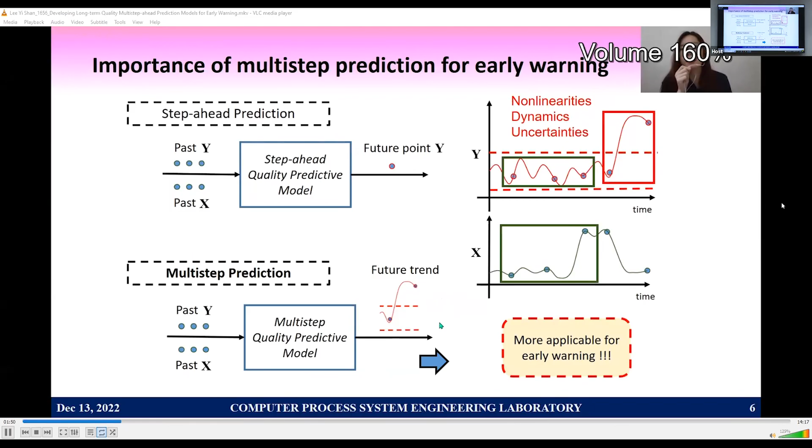So here is the brief idea of the multi-step prediction system. We will first construct a multi-step prediction model to predict the future process outputs from process inputs. Then a quality conversion model will be constructed to represent the static relationship between the future process outputs and the future quality data. With the combination of the multi-step prediction model and the quality conversion model, early warning is done.

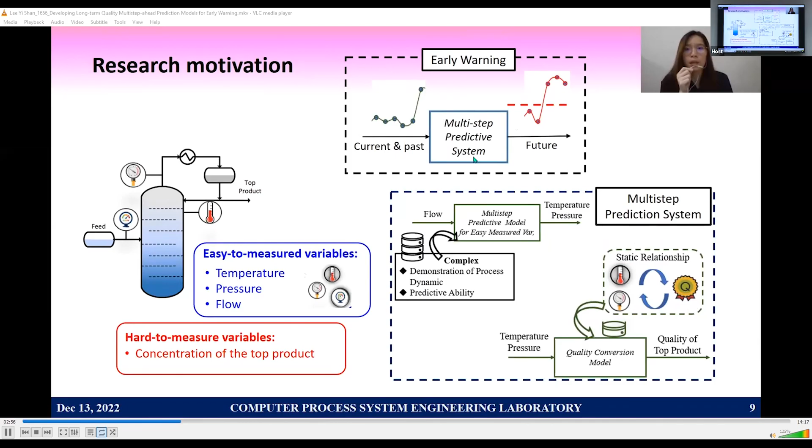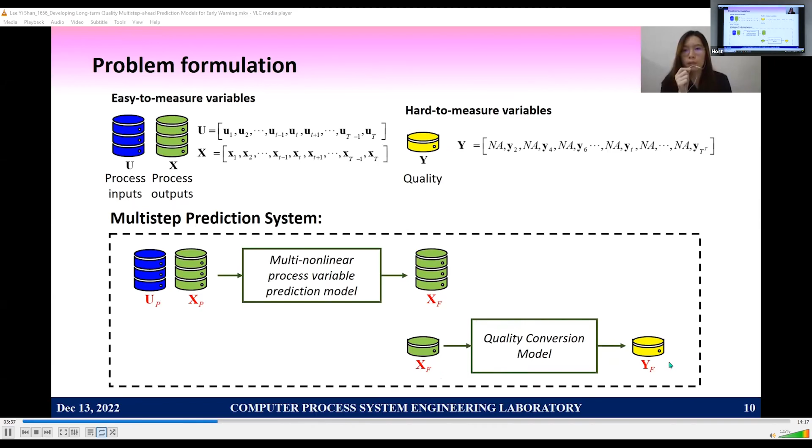So for the problem formulation, U represents the process inputs and X represents the process outputs. Y represents the quality variables, but some of the quality data is missing due to the difficulty in obtaining it during production. In the multi-step prediction system, by using the multi-step nonlinear process variable prediction model, the past process inputs and the past process outputs are used to predict the future process outputs. Then, in the quality conversion model, the future process outputs are used to estimate the future quality variables.

The multi-step nonlinear process variable prediction model is called the multi-step nonlinear state space model, multi-NSSM. It is developed based on the state space model here. The objective function of the multi-NSSM is defined to maximize the conditional relationship from the past process variables to the future process outputs. Hence, variational inference and Bayes rules are applied to derive the variational lower bound, and this is the variational lower bound to be maximized.

And this is the model structure of the multi-NSSM. The KL divergence term here represents the distance between the posterior and prior distribution of the past latent data conditioned on the past process inputs and outputs. To calculate this term, the past process inputs and the past process outputs are sent into the bidirectional RNNs, and it outputs the distribution of the past latent data.

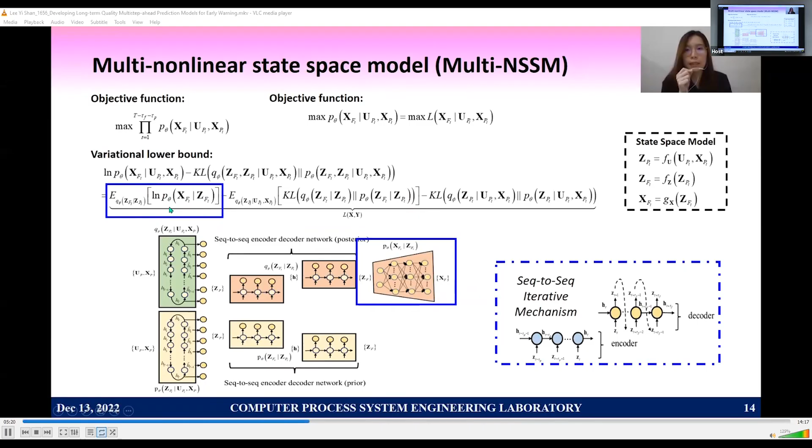Then the KL divergence term here represents the distance between the posterior and prior distribution of the future latent data conditioned on the past latent data. To calculate this term, the past latent data are sent into the sequence-to-sequence encoder-decoder network, and it outputs the distribution of the future latent data. After that, the future latent data are sent into the emission network, which outputs the distribution of future process data. Hence, the likelihood term here can be calculated according to this emission distribution.

So after the multi-step prediction model for the process variables is explained, now is the turn of the quality conversion model. The quality conversion model is called the regression VAE. It is developed based on the latent variable model here. The objective function of the regression VAE is defined to maximize the joint relationship of the process outputs and the quality variables. Hence, this is the variational lower bound derived from variational inference, and it has to be maximized to train the model.

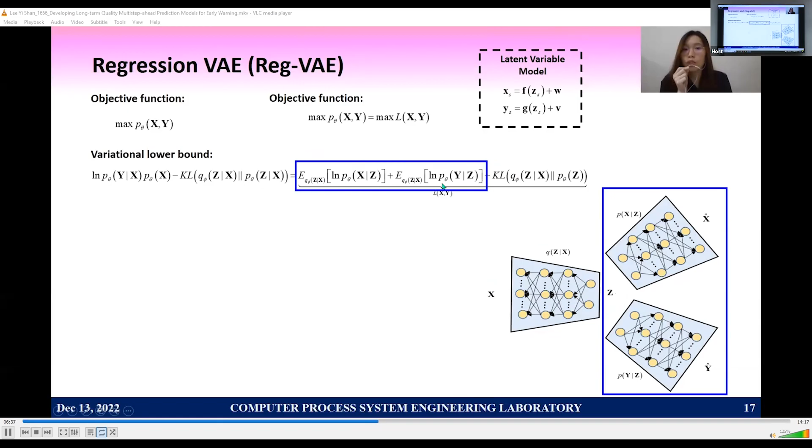And this is the model structure of the regression VAE. The KL divergence term here represents the distance between the posterior and prior distribution of the latent data. To calculate this term, the process outputs are sent into the encoder model, which outputs the distribution of the latent data. After that, the latent data are sent into the decoder networks, which output the distribution of process and quality data. Hence, the likelihood terms here can be calculated according to these decoded distributions.

To combine the multi-NSSM and regression VAE model, the past process inputs and outputs are sent into the multi-NSSM model, which outputs the future process outputs.

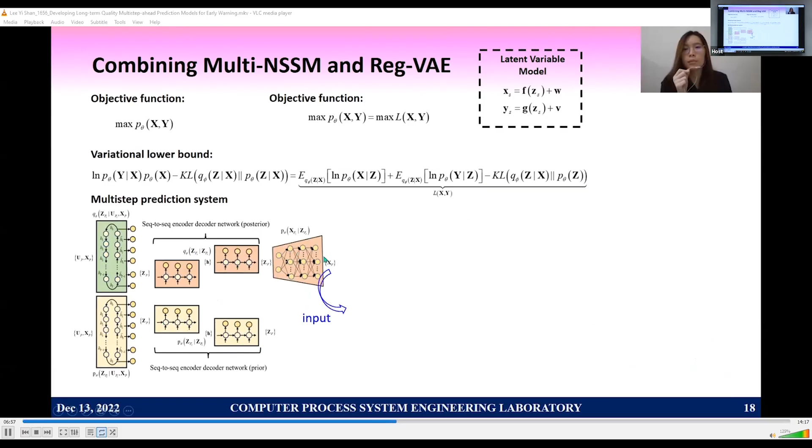Then the process outputs are sent into the regression VAE to estimate the future quality data. With the future quality trend, the early warning system is used to check the operating status. If the future quality trend falls out of the bound, it means that the process is operating at an unhealthy condition.

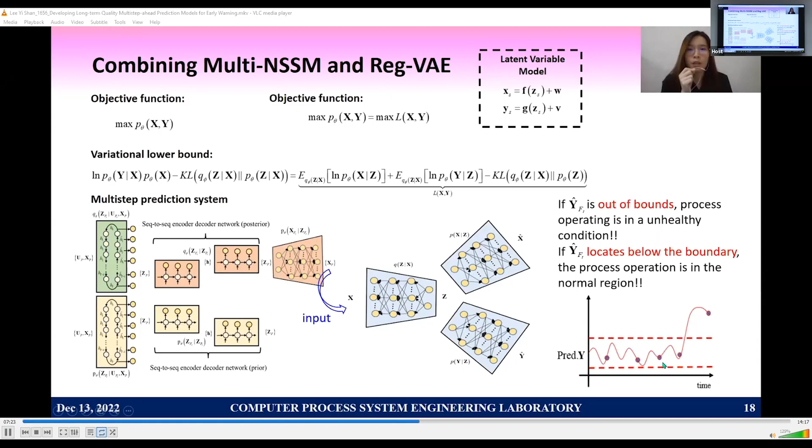So here, to test the monitoring performance of the proposed early warning system, the industrial ammonia simulation case is shown here. 19 process variables and 1 quality variable were collected in the historical data set. The sampling rate of the process data is 1 minute and the sampling rate of the quality data is 30 minutes. The data set is separated into 90% training data and the remaining 10% testing data. Thus, there are 2,100 process data and 70 quality data.

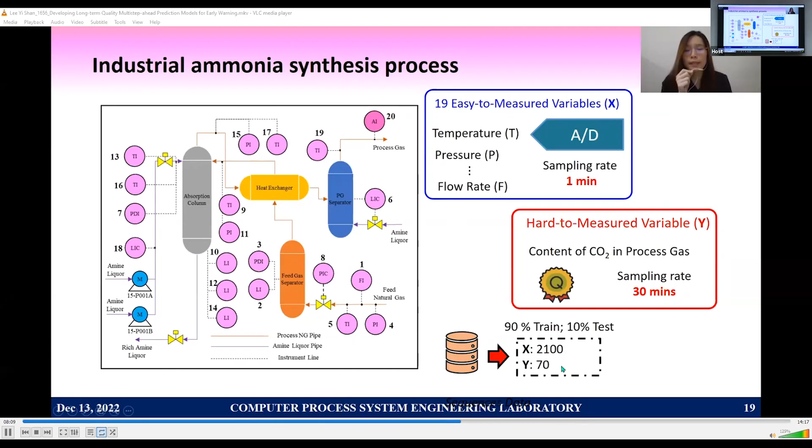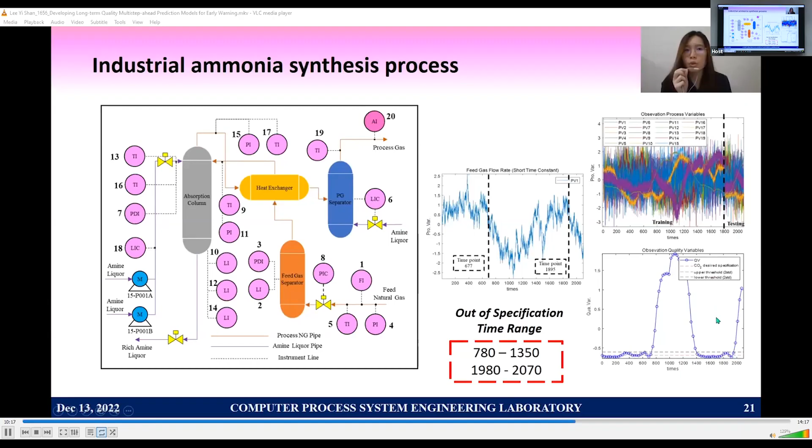Therefore, the sample points of 780 to 1,350, and the region of 1,980 to 2,070, are significantly out of specification. So the purpose of the multi-step prediction is to observe the impact of faults on the quality variable in advance. So after both the multi-step prediction model, the multi-NSSM, and the conversion model, which is the regression VAE, are completely trained, the multi-step prediction system on quality is ready to perform early warning.

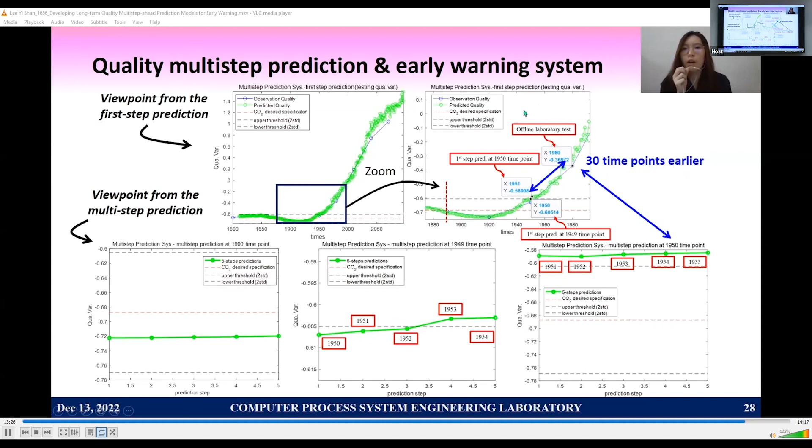Next, in conclusion, the integration of 2 deep neural network models can establish the multi-step quality prediction system with a small amount of quality data. Next, the multi-step NSSM developed as a probabilistic model can well describe the uncertainty of the process, while the multi-RNN cannot. From the industrial case, the impact of the fault disturbance can be identified in advance to achieve early warning of abnormal operating processes.